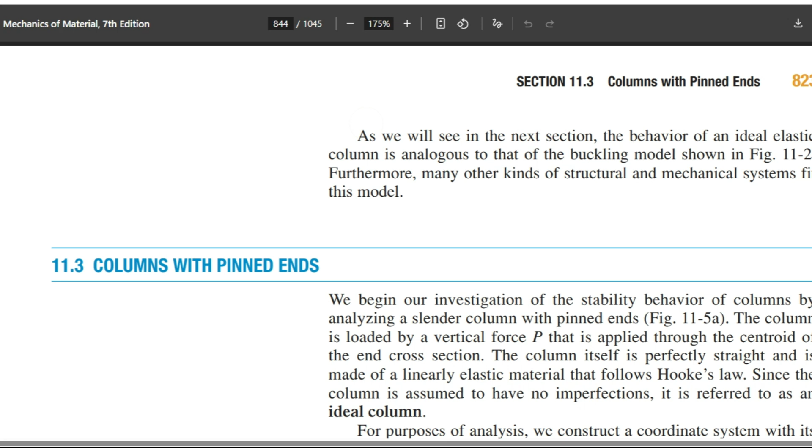But anyway, so we have material mechanics. This is James M. Gere, and we're continuing on column buckling. So let's go to that page. So what we're going to have, we're going to do the derivation. Just so you know, it's going to be like a second order differential equation, and it's going to involve sines and cosines. We're going to try to explain why that happens.

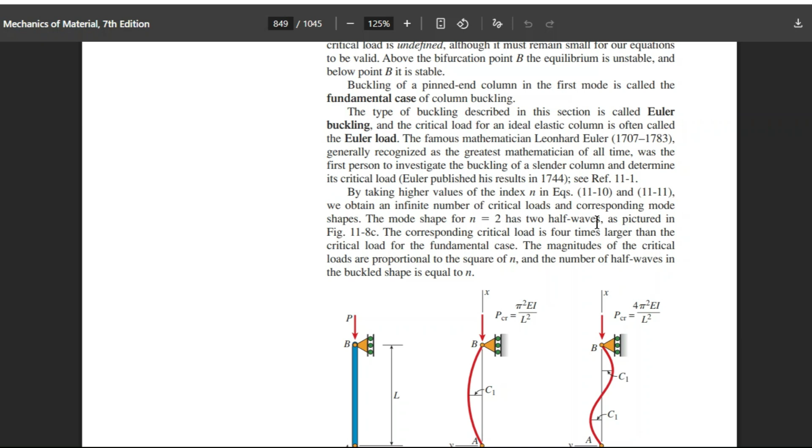So let's see where we want to start, because we do want to get somewhere decent, because here is the differential equation. Let's see if we can do this. Let's just read through the pages. I'm so bad at this, but we're just going to do that because you don't want to read it yourself. So might as well I read it and see if we can not take too many tangents.

So we begin our investigation of the stability behavior of columns by analyzing a really thin or slender column. And we're going to have pinned ends. That's going to be the first configuration. And why we're going to do that is because it's easy to check out the equations anyway.

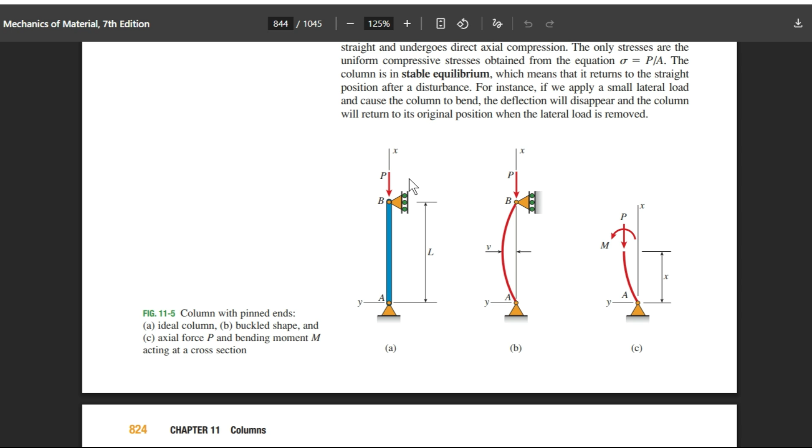So hell yeah, the statics equations. The column is loaded by a vertical force P that is applied through the centroid of the cross section. Anytime you see a figure, go to it and study it. So we got figure 11.5a. Pin, roller, P is going straight through, let's just do one at a time. So that was A: the column is loaded by a vertical force P applied through the centroid of the end cross section. That's important - in that first figure, there is no deflection, so that force goes right through the center of the cross section. The column itself is perfectly straight.

Oh hell yeah, people are liking my stuff. Alright, the column itself is perfectly straight and is made of a linearly elastic material that follows Hooke's law. And if it's just in compression, it's just going to compress like a spring. So we're going to see how it can get off kilter. For these columns, we've talked about how the reason it gets off kilter is because something pulled it laterally off kilter. Anyway, since the column is assumed to have no imperfections, it is referred to as an ideal column.

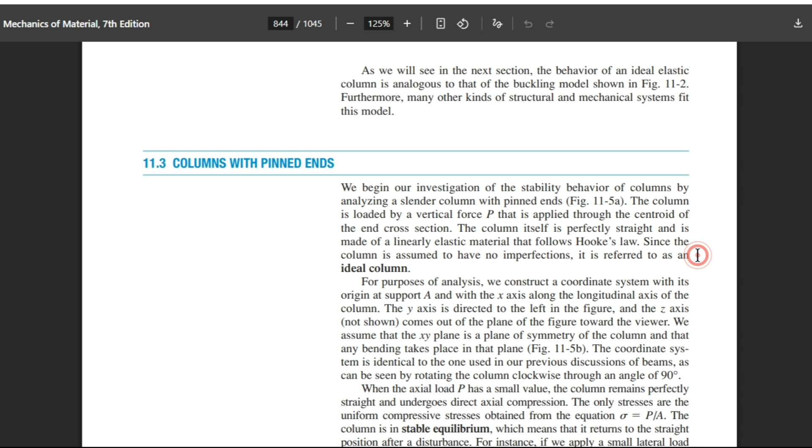And we can even zoom in. So for purposes of analysis, we construct a coordinate system with its origin at support A. So it's probably going to be right there. And then with the x-axis along the longitudinal axis. So that's kind of different. We're going to say, hey, this is the x-axis.

And anytime you throw one axis on, you got to find your other one. So I do the right-hand rule. Do like the karate chop, or do your four fingers in this direction with your palm facing this way. Then you're going to roll your fingers into this direction, and that's going to be x to y. As you roll your fingers, your right hand, your thumb is going to point out of the page. So they're probably going to talk about that.

So the coordinate system - with the x-axis along the longitudinal axis of the column, the y-axis is directed to the left in the figure, and this is where you can use right-hand rule. The z-axis, not shown, comes out of the plane. But I always do that - fingers in the x, roll into the y, and that gives you your z-axis.

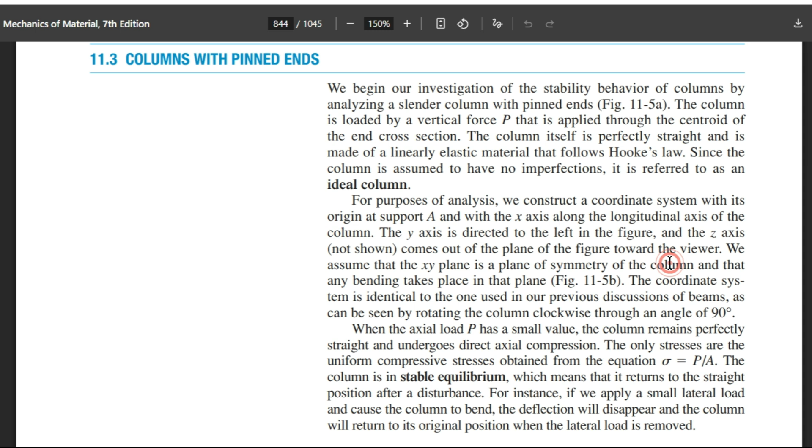Especially if you're going to do any cross products, you have to have your axes correct, else you're just making up an extra negative somewhere in the cross product that you're not going to be able to figure out. Anyway, we assume that the xy plane is the plane of symmetry. So in the page, that's the direction things are going to squish out. That's the plane of symmetry, and that's what we're going to say in the column, and that any bending takes place in that plane.

So now we're going to see figure 11.5b. So when it gets bent, it's going to bend about this - if we're looking at a sheet of paper, just the page, so it's not bending out towards us.

The coordinate system is identical to the one used in our previous discussions of beams, as can be seen by rotating the column clockwise through an angle of 90 degrees. Okay, hell yeah, so that's what we're going to say.

It's like this is just a beam that got bent, but then we just rotated it clockwise. Keep that in mind, because if I have the tradition of just saying this is the x coordinate, positive in that direction, and this is the y coordinate, I would be rotating this thing down that way. And then this is where I kind of got confused.

This is actually bent in a frowny face. That's actually a negative moment, and that's what got me tripped up, because the next thing they're going to show is this moment diagram, and they're always going to put the moment where it makes it positive. So you can see that this frowny face is made by a moment going the other direction, but we always put the positive direction on. And so, that's kind of interesting. But interestingly enough, they don't put the positive direction.

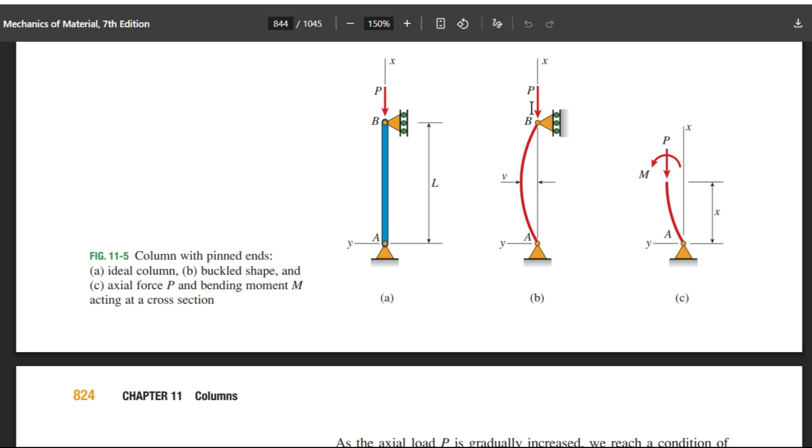Axial tension should be positive, but this is showing axial compression. So, leave it to textbooks to mess with the sign convention. You shouldn't be messing around with that. Every student is just going to get messed up if we don't over-explain the sign convention. Anyway, moving on, that's just the usage of sign convention.

So the coordinate system is identical to a beam, just rotated 90 degrees clockwise. And we can see that ours is a frowny face if we do that. So when the axial load P has a small value, the column remains perfectly straight.

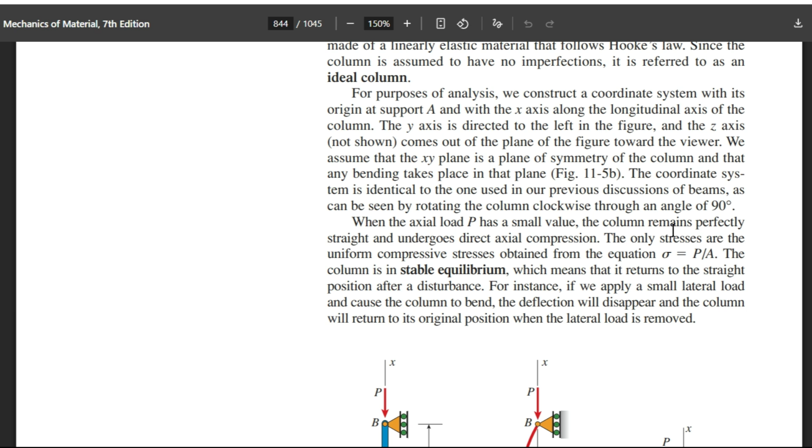This always just remains straight and undergoes direct axial compression, just like a spring being compressed. The only stresses are the uniform compressive stress obtained from the equation, the compressive or normal stress, which has units of force divided by area. It's just the force divided by area, you know what I mean?

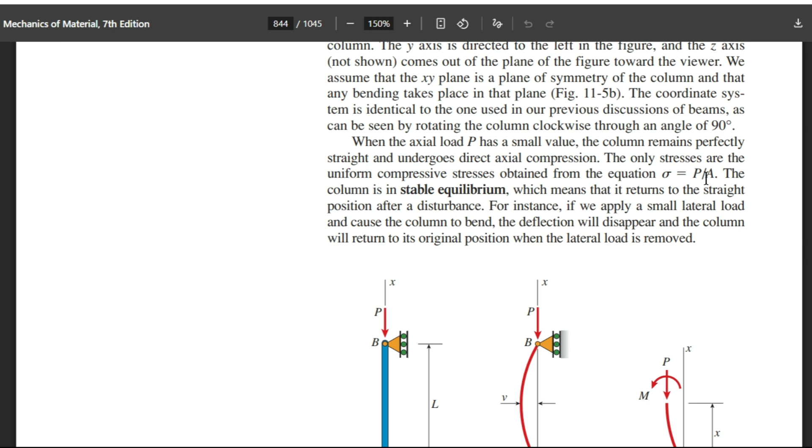The column, in this configuration, is in stable equilibrium. We don't have any bending, bowing, or buckling, which means that it returns. So what they're saying, back up to this sentence, it says when the load is—to actually make these scenarios, previous to this we were setting this up like the 2 bars with a really stiff rotational spring.

So when you apply some sort of change in angle to this spring, hell yeah, it wants to spring back. One way to look at this is this spring is just hella stiff. And it's not that this force P is pushing on the spring—hell no. It's that you're applying a load, hanging some sort of weight, and you are actually pulling this. So for this diagram, you are the external force pulling this column, like the act of God that happens in a building that says, hey, I'm going to shift this column this way.

But that's going to require a hell of a lot of force if this spring is hella stiff. This load then is in kind of a place to actually drive it farther, but you provided that heavy load to pull it outward, and so that load is wanting to spring back. So when you do let go of the load, this force does nothing, and it just returns to a straight position. But then you get into a critical place where maybe you design this column where you didn't get the stiffest spring.

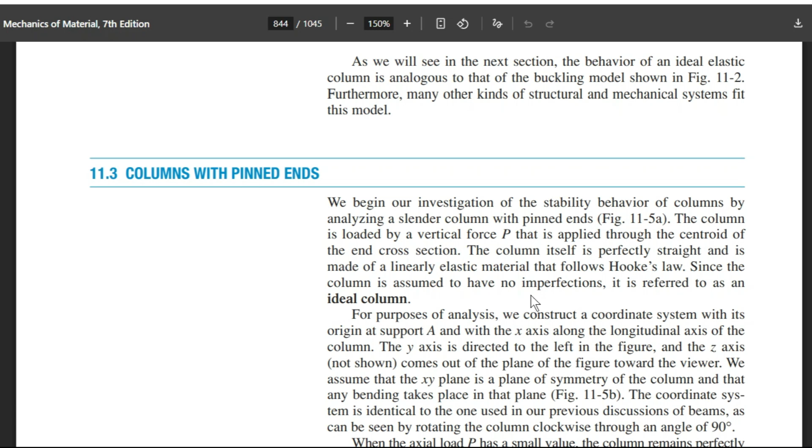So that is critical to the assessment of beams, because that's what we're doing. It's saying, hey, when we apply some sort of little force—this is the act of God, something actually pulled sideways on it—we get this bend to happen, and then we let go, they call that the disturbance in the force. And then it just returns, because this beam is just a hella stiff spring.

You can imagine this beam is just like one of the stiffest bow and arrows. This is the bow, and it's a beam. So if you use a beam as a bow and arrow, hell yeah, you'd be pulling—it's a hella stiff spring. It's going to spring back. So that's what we have going on. Hell yeah, so that's pretty good.

Now we can kind of move on. So this says when that axial load is small, the column is in stable equilibrium, which means that it returns to the straight position after disturbance. I wish they said that sentence in reverse, like, hey, when you disturb the column. I guess they've been talking about what the disturbance is, but I think they could do a better job of dialing that in, because that wasn't too clear for me the first go around.

Okay, so for instance, if we apply a small lateral load and cause the column to bend—see, they talk about that more—the deflection, after the disturbance is removed, will disappear and the column will return to its original position when the lateral load is removed.

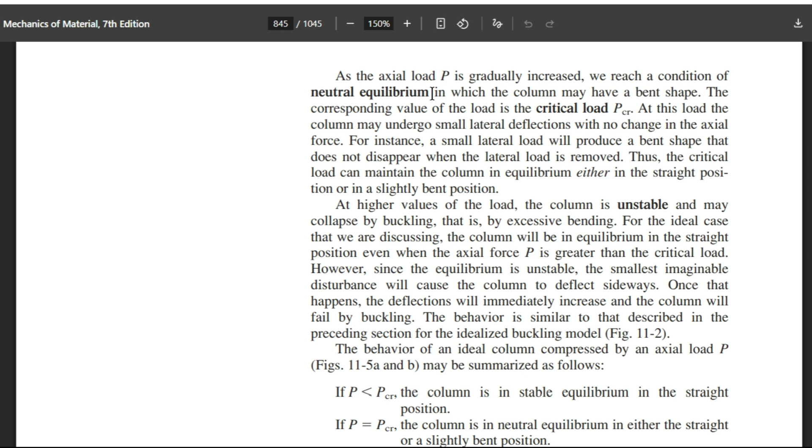So we can come back up here, this is the better one to look at. What we have is, hey, if this part of the beam rotates this direction and rotates flat, we have a collapsed beam. So this spring wants to rotate it back to vertical. We talked about in the other video that if you apply a moment, it doesn't matter where you apply it on a rigid body, it's going to rotate.

Well, I don't want to get into that. But anyway, this moment's going to try to rotate this thing back vertical, and then this load separated by this distance is going to try to make it collapse the other way. So what is this load making collapse? It's because it's providing a torque, which is a couple—two forces separated by this distance. This distance is going to be a function of half the length times sine of this angle.

Because the angles are really small in these, what caused it doesn't take too much of an angle, but we're going to say that sine theta is equal to theta. So this length is just, instead of half the length sine theta, it's just half the length theta. And that's going to be this distance. The force is P, so the actual torque is just one of these forces times that distance. So we have P times half the length times theta. So that torque is a function of theta.

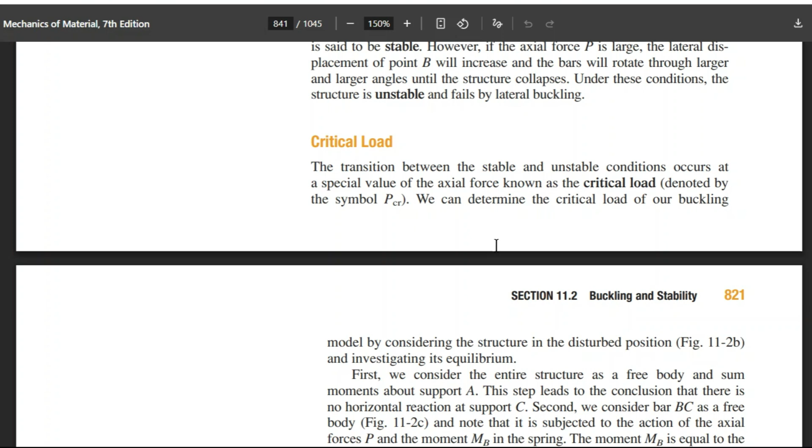And so that's kind of weird and creepy, because people are going to die anyway, since it's not going to take too much more load to just kill everyone. All right, hell yeah. So here's the equation for that. You use this, do a free body diagram, and sum the moments about B.

It's going to be the moment at B, which is the spring stiffness times the angle. The angle that forms, this used to be 180, and now it's this crunched-in angle. If you consider this whole triangle, it has 180 degrees, and then it got reduced by 2 theta. See how all the angles in this triangle had to be 180 minus this theta minus that theta. So this change in angle from there compared to here is 2 theta.

And a positive rotation due to the spring is going to be counterclockwise, so right hand rule, thumb out of the page. And so we come down to here, our moment equation. We're going to sum the moments at B.

We have moment at B positive minus that couple, which is the load, times half the length times the angle. But we can see that this is going to be the spring stiffness times its angle, but this angle formed was 2 times the angle. So we have 2 times the spring stiffness theta minus this load times half the length theta.

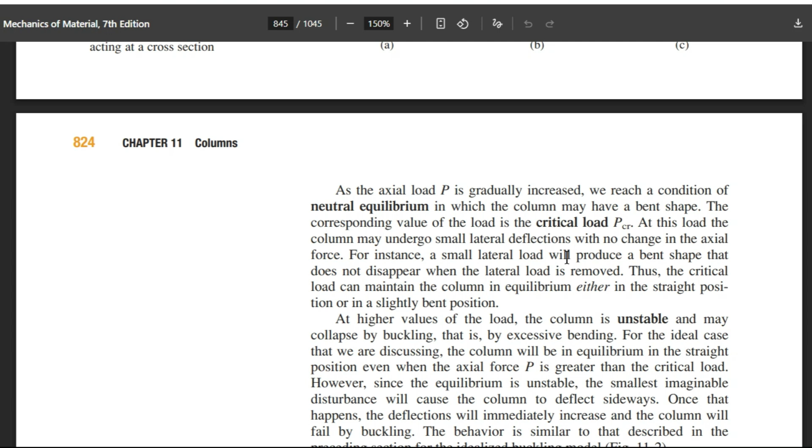So it doesn't matter if I double theta. If both of these terms are equally balanced, then we have no net torque. And so when we do disturb it, so there you go. That took forever, that was pretty decent, getting better at kind of explaining that.

And so when we do have this act of God pulling out, cool. The restoring moment of the bow, we talked about bow and arrow, of this beam is going to want to restore it. But this load is now having a force that, so if we take the moments about A, we're going to see that we have P times this distance.

And that's going to be a moment that causes it to rotate more this way. So if I take just this kind of ideal chunk of beam, if it rotates that way, it's going to flatten and pancake and buckle. If it rotates back vertical, hell yeah, that's kind of what we want. And so what's creating it to rotate back vertical is this moment. But that's where they have just the positive moment on here.

But we know that the moment generated by bending a beam this way is the opposite. Because to bend a beam this way, again putting this x-axis down, if I had my y-axis and x-axis, this beam would be bowed upward, which is a frowny face, which means that on both sides of it, we had to apply a moment this way and this way. So if this is a little chunk of that frowny face, to get this frowny face, I need to take that moment and apply it that way, so the arrow is going tail to tip. But in this diagram, they're just showing the positive moment.

This is kind of messed up because they're not showing positive axial tension. I was thinking if they're showing shear, but no, this is axial tension—this has nothing to do with shear. There is no shear forces on something in pure bending. I think that's a faux pas. They could have shown this in axial tension, knowing that's going to be negative. Why put this in compression, show it's positive, then have this moment, and just throw in the moment like, oh, sign convention says this is the positive moment. Just draw your sign convention so it's always positive for both, not mixed.

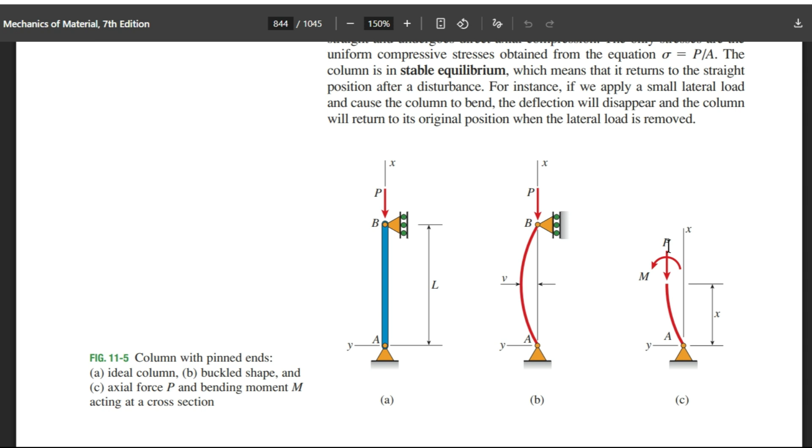That drives me crazy, because no student is going to look at that and know exactly what's happening. So, all right, hell yeah. Cool, so where are we at now?

So now, as the axial load P is gradually increased, we reach neutral equilibrium. We did a pretty good job explaining that, and I think it was important—so the column may have a bent shape. The corresponding value of this load is the critical load P, and the spring force doesn't change in the beam. It's linearly elastic, a function of its material. But this load, you can make this load meet that, so think about it—this load, you're reaching a critical load.

At this load, the column may undergo small lateral deflections with no change in the axial force. And that's the act of God—anytime they're talking about lateral deflections, you are applying an external force to make that happen. It's not the driving force down from the column; from the ideal situation, that column should just be in axial compression. So you are applying that small lateral deflection.

When that happens, we have no buckling and no restoring force. When you think about this small lateral deflection, you have to say you are deflecting it, and it takes a force to do that. You're pulling it because you're moving mass, but then you're holding it in that location, and then letting go, and seeing what happens. In that case, it statically stays there. So a small lateral load will produce a bent shape that does not disappear when the lateral load is removed—that's just another way to say it.

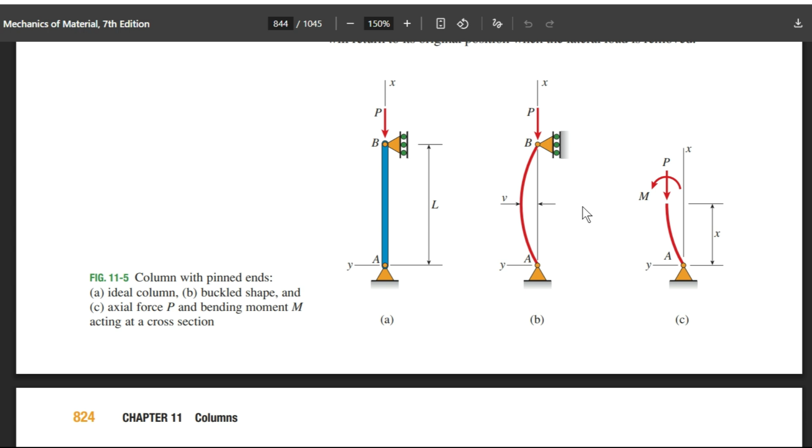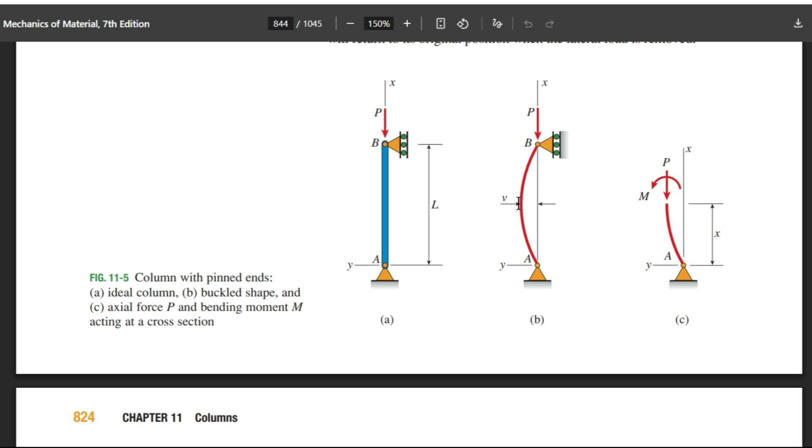So I think that's good to know. It's like we are physically displacing it. Think of a huge giant that can just move it - it doesn't care what it feels like between its fingers. But then once it lets go, oh hell yeah, then you're going to have a collapse.

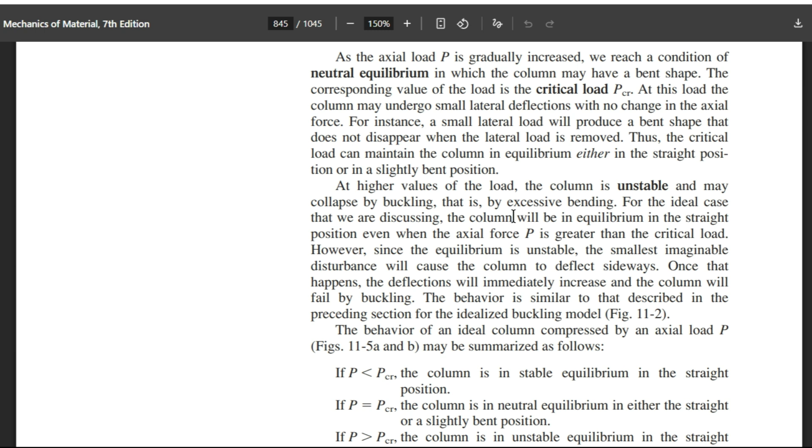Okay, so that's what we're going to talk about - that's the unstable equilibrium. The column was normally just taking a really high load, but it was totally straight. Let's see how they explain it: it may collapse by buckling, that is, by excessive bending.

And they really don't even talk about it - an external disturbance pulls it sideways, and the torque due to the load outdoes the torque due to the bow characteristics, that resisting spring moment of the actual beam.

So for the ideal case we're discussing, the column will be in equilibrium in the straight position, even when the axial force P is greater than the critical load. So this would be kind of cool to set up columns where you get a higher load and then you just push on them and they instantly collapse.

However, since the equilibrium is unstable, the smallest imaginable disturbance will cause the column to deflect sideways. And once it does deflect sideways, then you have a runaway train, because that load based on the angle that gets created causes the moment, and that moment's always going to be bigger than the restorative spring force of the column being bent. So once that happens, the deflections will immediately increase and the column will fail by buckling.

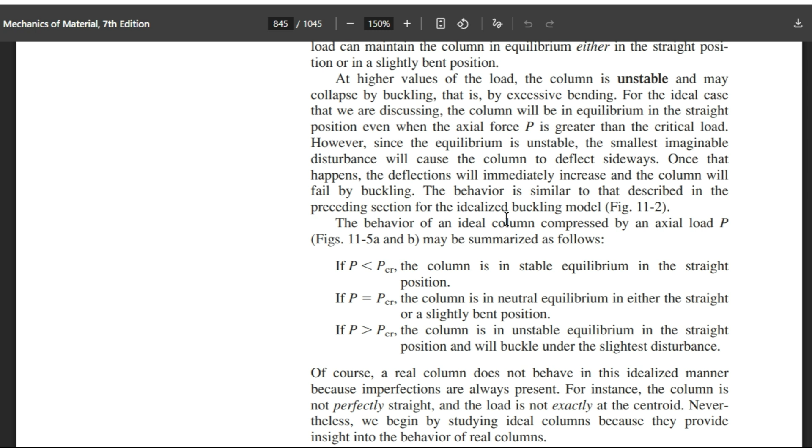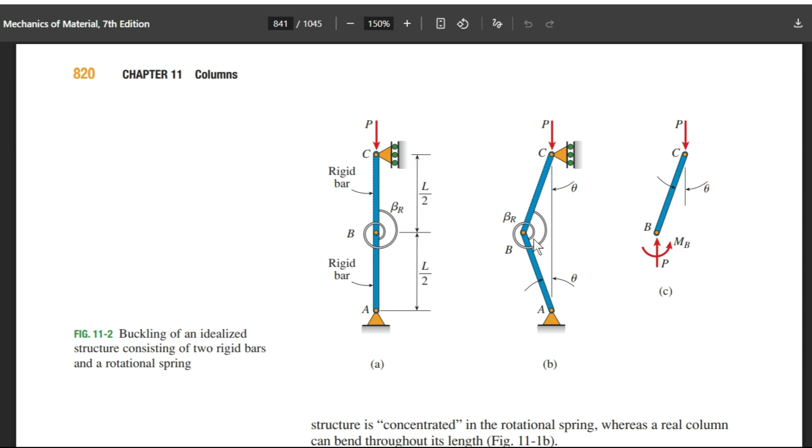The behavior is similar to that described in the preceding section for the ideal buckling model, figure 11.2. I think we talked about that - you provide the act of God and then let go, and this load is creating a torque that's bigger than this weak spring, which is the property of just the characteristics of the beam or the column. So it can't restore and it collapses.

Okay, hell yeah. So where are we at? Yeah, that unstable equilibrium, that was figure 11.2. The behavior of an ideal column compressed by an axial load P may be summarized as follows: that load can be less than the P critical - no one dies, the column is in stable equilibrium. If it gets jarred to the side, it returns to a straight position.

So the column is in stable equilibrium in the straight position, and that's what they're saying - it's in stable equilibrium. That's why you can move it to the side and it still stays stable. It goes back and restores.

If the load is right at that critical point, I mean, you're never going to see that - either people died, or no one's going to be like, oh look at that bridge, it's moving that way, or look at that column, it's bowing that way, hella, and everyone's still on top of it, whatever, and everyone's just happy. Hell no.

But at this P-critical, the column is in neutral equilibrium in either the straight or slightly bent position, and it can move through that bent position. Something like an act of God can move it to a different location and it'll just remain there - it's not wanting to collapse and it's not wanting to restore. And then we have total failure, where the load P is bigger than that P critical - the column is in unstable equilibrium in the straight position and will buckle under the slightest disturbance.

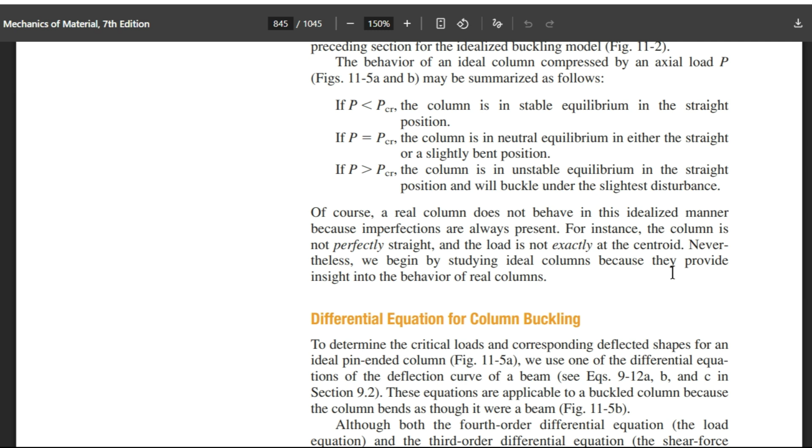Of course, a real column does not behave in this ideal manner because imperfections are always present. For instance, the column is never perfectly straight and the load is not exactly at the centroid. Nevertheless, we begin by studying ideal columns because they provide insight into the behavior of real columns.

And now here's where I'm exhausted - I don't want to do this anymore, and it's just because we're up against differential equations. But I do want to read through this because I think we can. We're just going to go through and solve, and we're going to read - damn it, look at this. We're going to read to at least here, right to where we get to the critical loads.

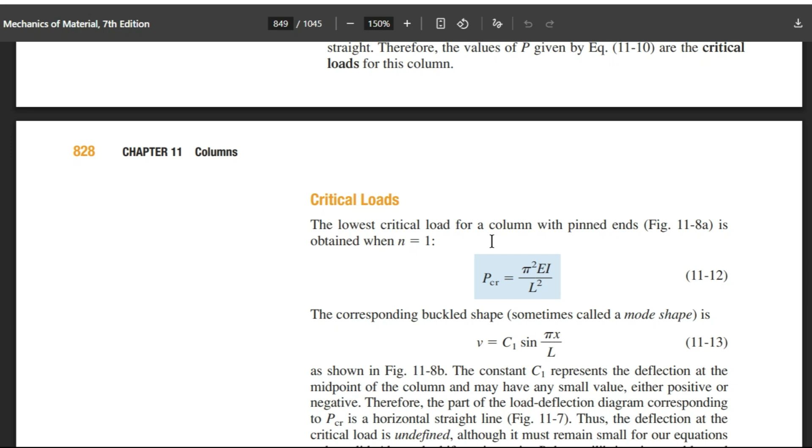I think if we read through to the actual bringing up of the differential equations and solving for the constants, we have to read through the critical loads because we have to solve for C1. Okay, I think we can do it. I don't want to, because it's difficult, but I think we're pretty good on this.

At least for the first go-around. So, differential equations for column buckling: to determine the critical loads and corresponding deflected shapes for an ideal pin-end column, figure 11.5a. So we got to look at these. So there's your figure. The figure is below us.

We use one of the differential equations of the deflection curve of a beam. These equations were in Chapter 9. I'm not going to go thumb back through there, because when I see an equation like this, it's hard to wrap your mind around. But these equations, that's another proof, and if you can go through that proof and see it, good for you, that's amazing. So these equations are applicable to a buckled column because the column bends as though it were a beam. I'm pretty good at beam bending, I kind of understand that.

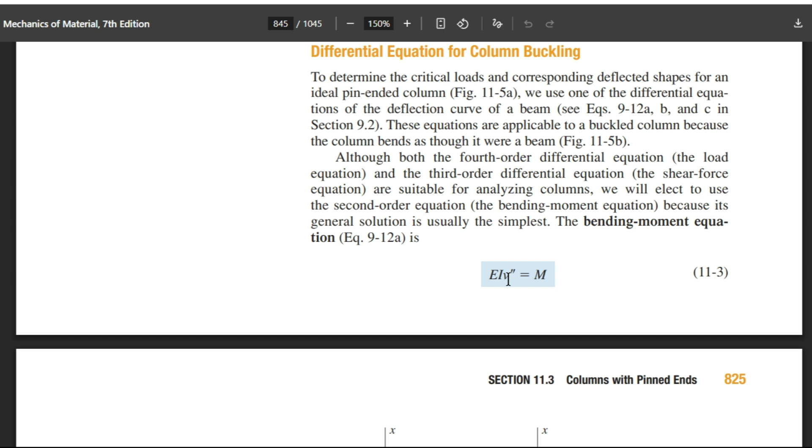Let's read this. Although both the fourth order differential equation - this is a second order differential equation, meaning we have deflection, and deflection with respect to the change in x. Let's talk about that.

Even though we're vertical, if I come out to this distance, let's say x, here's my deflection. If I change x in the positive direction, what happens to my deflection? It goes down - that's the first differential equation. From this point, I'm going to have a negative change in the slope. So if I increase in the x direction by 1 unit, my deflection, v, goes down, but not as much.

That's the first derivative. The second derivative says, okay, from this flat spot to here, it went down, but is it going down a lot? I think it's easier to make bigger slices. From here to there, did it go down very much? No, but it did go down. So from here to here, that first derivative, the change in deflection as I move in x, it went down a little bit negative. And from here to there, over the same distance in x, it went down a lot more.

So if I divide this up into halves: if I change x this amount, this deflection decreased a little bit. If I change x another amount, whoa, this deflection decreased more than half - that was a bigger change in deflection.

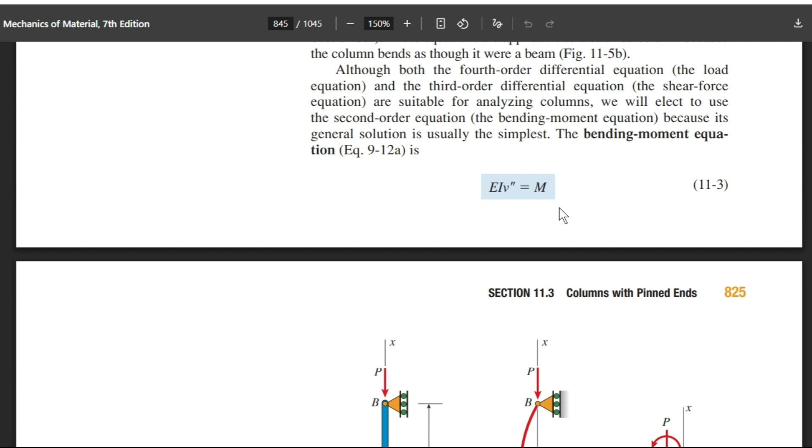So then it says that both the fourth order - was that even for fourth order? No, the first one was deflection, the second one was the rate of deflection - that's the first differential equation. The second differential equation: the first is the slope of this line, the second is the change in slope, and that's what we have. The moment generates a change in angle, a change in slope. But then if you have a change in slope, the third equation is... bummer.

Although both the fourth order differential equation, the load equation, and the third order differential equation, the shear force equation, are suitable for analyzing columns, we will elect to use the second order equation, the bending moment equation, because its general solution is usually the simplest.

And I gotta take a break. Alright, hell yeah, so we got some ice water. We're gonna do round 2. We're gonna pump this out.

So I'd have to go back and be like, what's the fourth order? What's the... you know what I mean? But yeah, because shear, like to actually find the deflection is going to be... like what is that? The deflection, although both the fourth order differential equation, the load equation, so is it saying that this is a fourth order with respect to the load? I think that's kind of what it's implying. Don't quote me on that. But anyway, cool, so I'd have to go back and review that.

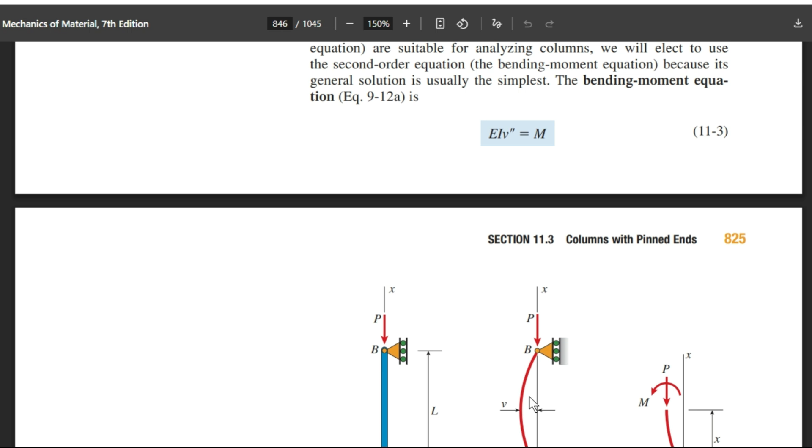So in that equation, M is the bending moment. We have the equation EI times the second derivative, which is the change in the deflection as we change X, and then we have a change in that change. So it's a double derivative, the second derivative of deflection with respect to position along that axis.

I think we did a pretty good job. Anytime you get a differential equation, walk your way through it: pick a value, change your x. What happened? The deflection changed, negative. Now do x again, the deflection changed again, it changed more. So the difference in the change, the second derivative, is a bigger negative number.

So M is the bending moment at any cross-section, and V is the lateral deflection in the y direction. We've already said this is a positive deflection. In the books, when you have the normal sagging smiley face beam, that deflection is always negative. Your beam is smiley facing, your bending moments are positive, but your deflection is downward in the y direction. So this is a negative moment causing this.

The right hand rule—think about this. If I take my right hand and sweep it this way to try to get this, that's not how we determine positive bending. Positive bending is like if I have a section, to actually get it to bend, I have to apply a moment this way, and then a moment this way. Both of those, you can't use your right hand rule because they're different directions. But we're saying that's causing it to smile, and this is a frown, with this as our x-axis and this as our y-axis. Draw this, rotate it 90, and we have a frowning face. The y-axis is up, the x-axis is that way.

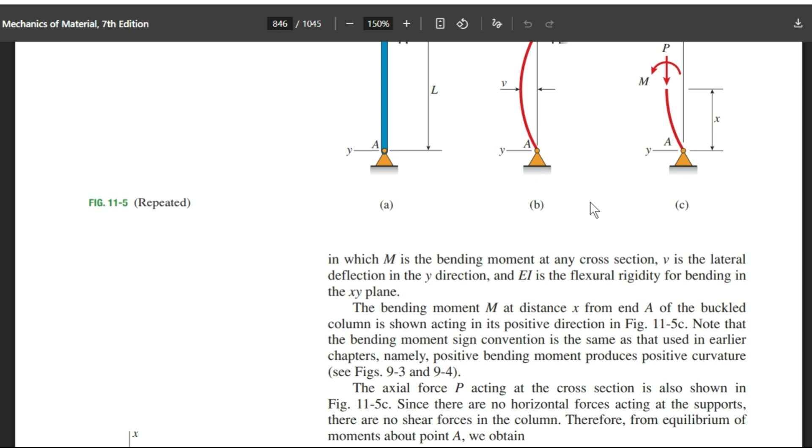Since there are no horizontal forces acting at the supports, there is no shear force in the column. Therefore, from the equilibrium of moments about point A, we obtain this result—so cool, no shear forces. We're just going to sum the moments about point A.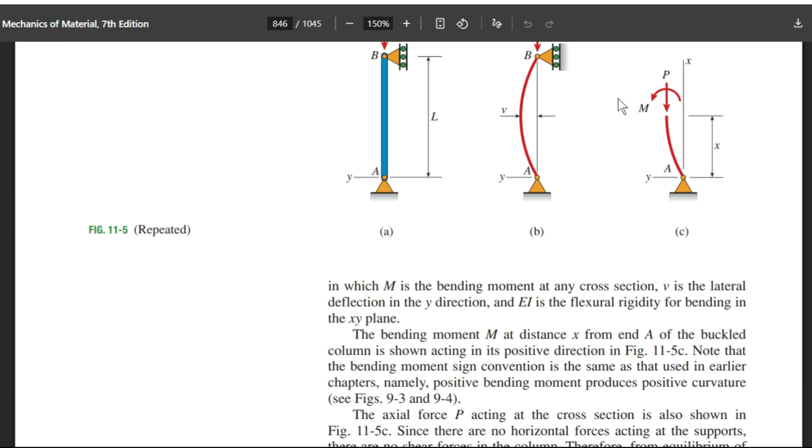This P is offset by some distance, which is going to cause a moment. By the right-hand rule, that's a positive moment. This bending back is going to cause a negative moment. Hopefully that's what we see from this equation. They show the positive moment just being positive, but obviously this is a negative value.

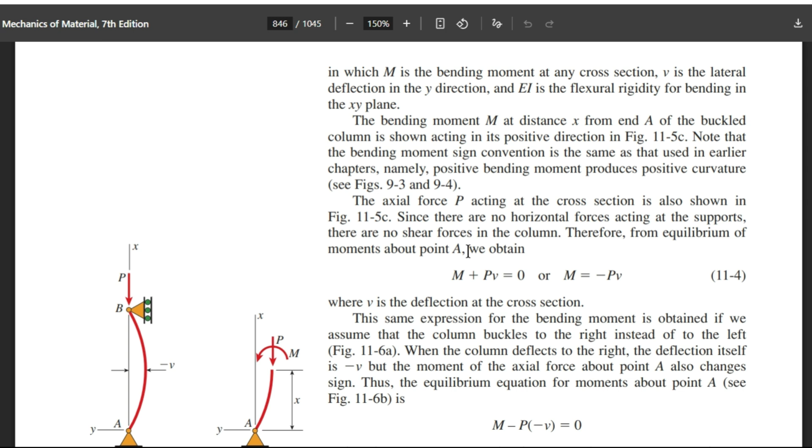And then we have P, PV—the way they have this drawn, P would just be a positive value. So all sorts of things going on here. From the equilibrium of moments about A, we obtain the moment—assuming this is the direction of the moment and this is P, both by the right-hand rule this way.

So I'm going to have M plus PV equal to 0. But if I rearrange and move one to the other side, the moment is actually the opposite of the force and the deflection. So this force with this distance is causing it to rotate that way; the moment has to rotate it the other way for this to maintain equilibrium. That's the equation for equilibrium, where V is the deflection at the cross section.

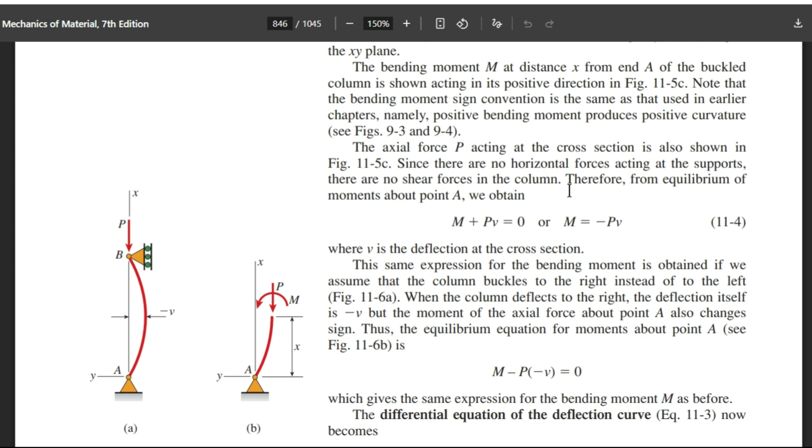This same expression for the bending moment is obtained if we assume the column buckles to the right. So if I move this column buckling to the right, the load P is down, I'm going to have a negative P times that distance, giving a negative PV. But they're going to say that V is also now negative, so I have a negative P and negative V—absolute madness. And then they're still going to say the moment is positive.

So hopefully that's what they do—yes, that's what they do. They say we have a positive moment, but a negative P and a negative V, so we get the same result. But that one is a real humdinger to work through.

This same expression for the bending moment is obtained if we assume that the column buckles to the right. So this is how it's buckling to the right, and the deflection is a negative V—that's what they show here. When the column deflects to the right, the deflection itself is a negative value, but the moment of the axial force about point A also changes sign.

So the moment of this force P also changes, and thus the equilibrium equation for moments about A becomes M minus P times negative V, which is just M plus PV—the same thing, giving the same expression for the bending moment M as before.

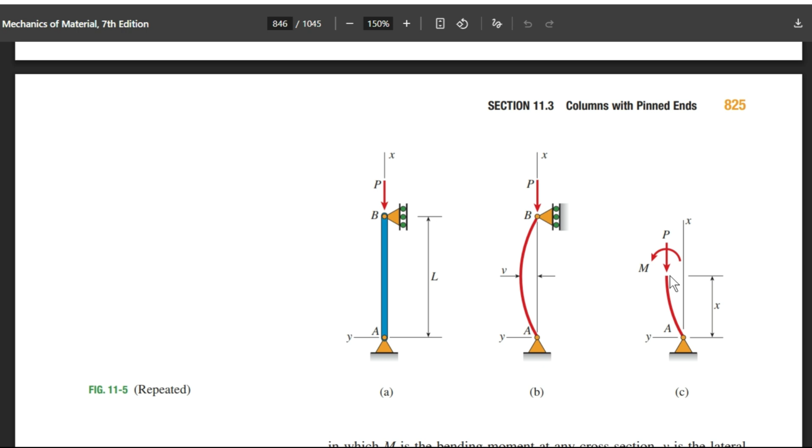The differential equation of the deflection curve now becomes—because we have this moment as a function of x, since we took some random point x and we have a tendency for that portion to, hopefully, remain stable—here's the moment, this is the moment. Let's see if we can actually figure this out. They're going to throw out that equation for the moment.

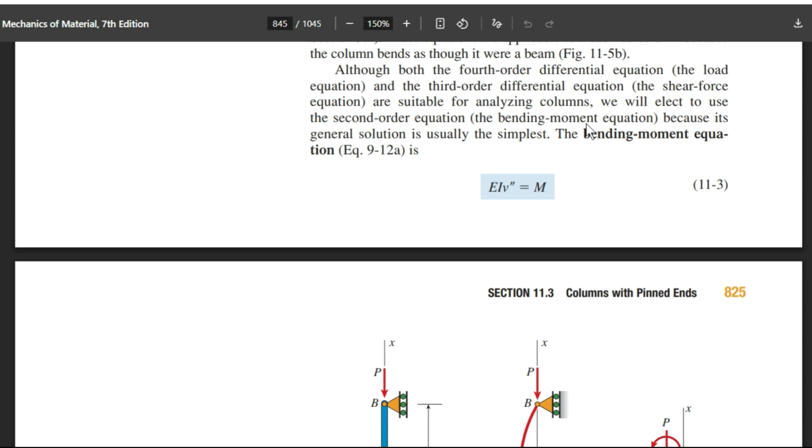So if I look at some deflected shape, the moment generated in that beam is going to be a function. The moment at any location, say this location X—maybe we are at the center, so on either side I don't have any change, that's going to be 0. So I don't have any change in the deflection there.

But if I go this direction, I do have a change—the change in deflection is negative, and if I go a little farther, it's increasing. So at this location, the second derivative is going to be a negative number that's bigger than at other locations—actually it's going to be that value right there, and it gets bigger and bigger as we go this way.

If I started here, I'm increasing—the change in the deflection is positive. But the rate of change is actually getting more positive, then less positive, then less positive again, so that rate of change is actually negative. So that value is going to be negative. I'm not sure if this has to be continuous or not.

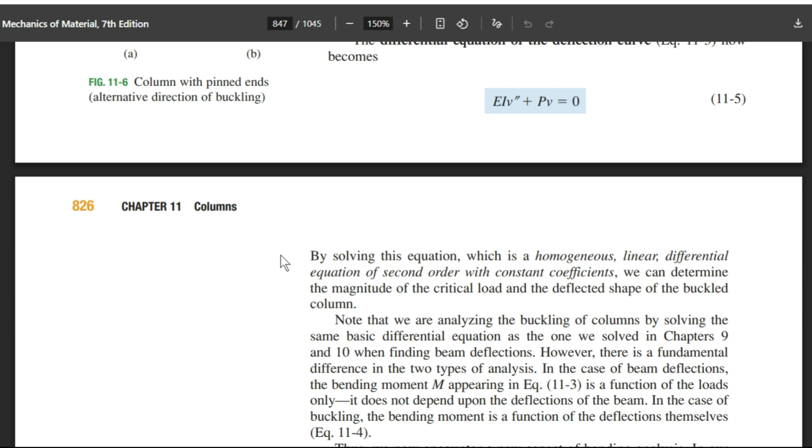Booyah. So this is going to be a second order differential equation. Let's just, this first go around, let me just read the words and then see if we can come up with anything. So by solving this equation, which is a homogeneous, need some water...

Linear differential equation of second order with constant coefficients, we can determine the magnitude of the critical load. See, I'm just spacing out, but we can determine the magnitude of the critical load and the deflected shape of the buckled column. So we're going to solve this, and we're going to get a solution based on the critical load and the deflected shapes of the column. Let's see if we can do that.

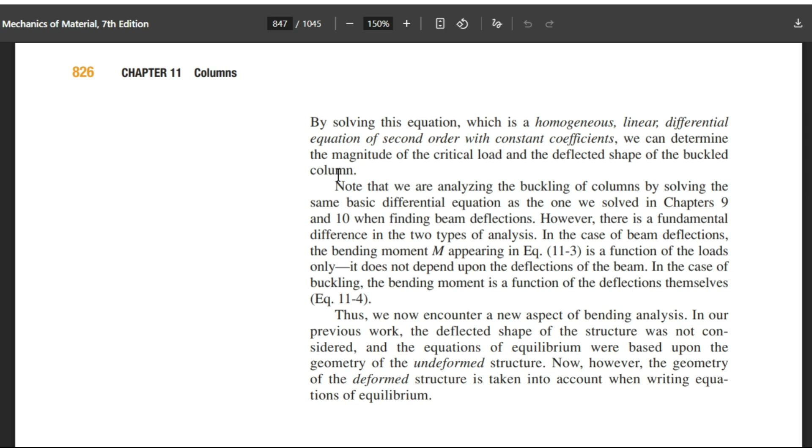Note that we are analyzing the buckling of columns by solving the same basic differential equation as the one we solved in Chapter 9 and Chapter 10 when finding beam deflections. However, there's a fundamental difference in the two types of analysis. In the case of beam deflection, the bending moment M appears in equation 11.3

is a function of the loads only. It does not depend upon the deflections of the beam. So our equation is saying, hey, we are going to deflect the beam out. Is that kind of what we have?

In the case of buckling, the bending moment is a function of the deflections themselves. That's kind of the act of God part. So the only reason this is actually going to fail is that something deflected it. So this part of the equation is probably the difference between the other equations from the other chapters.

So at any value of x, I'm going to throw a value of x in, and I'm going to get a deflection. We can even talk about that because it's good to see, because this is where I'm okay at doing this. If I say, hey, this is my x value, at x equal to 0, there's 0 deflection. So now let's go back to this differential equation.

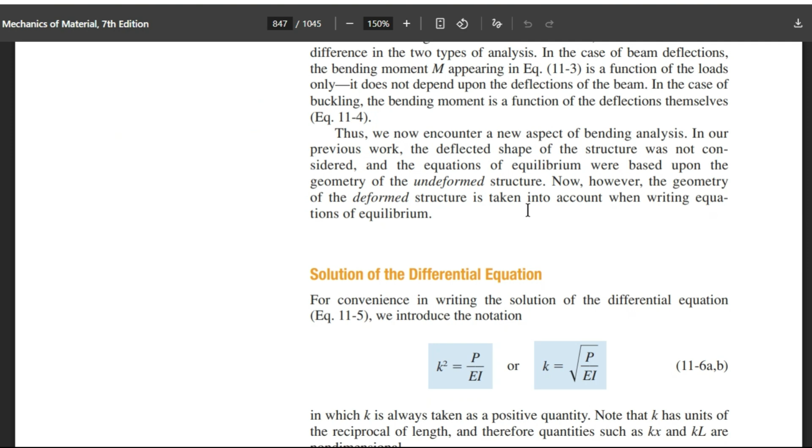And then what are the other locations? The other aspects of sine and cosine is when x is equal to, well, that's where they're going to get into it. This is an angle in radians. And if it's 90 degrees, is that what you say? You know what I mean? If you have sine of 90, this becomes 1, and this becomes 0.

And so if this value right here, kx, becomes like that 90 degrees, which we call pi divided by 2, then this becomes 1, and then the deflection... yeah, but I think we just need to read more about that one. But yeah, we got the first one down. That was pretty solid.

And then we kind of understand from a word-based perspective, this is different because we are actually providing the deflection, and that comes into our equilibrium equation. And our equilibrium equation is a...

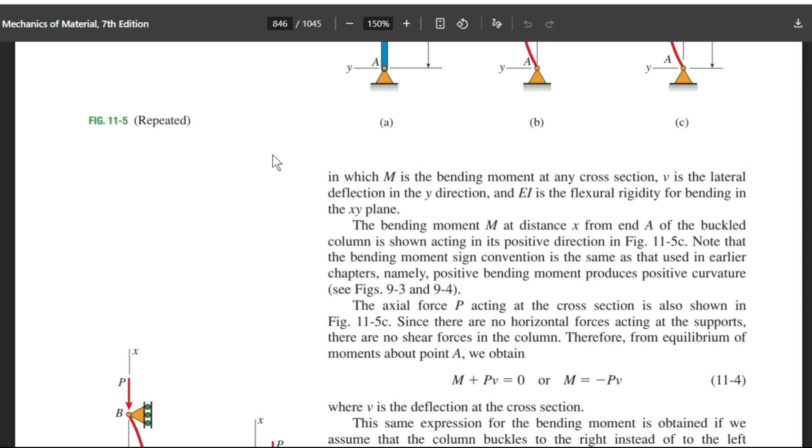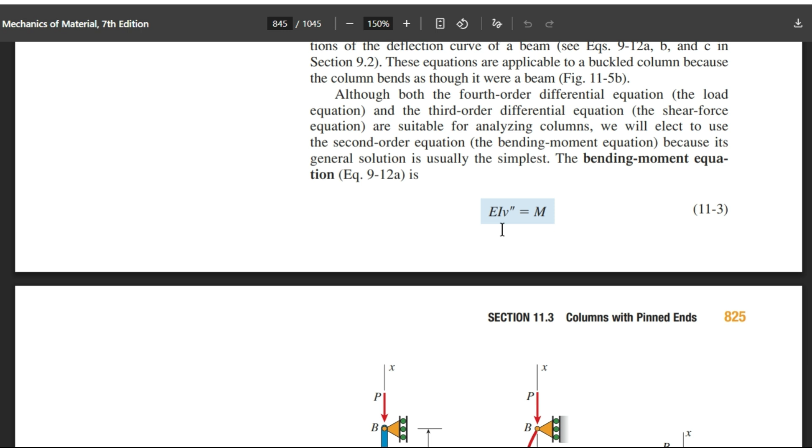Differential equation, because the value for that moment is a function of, let's read this, the material properties and the rate of change. I think I could explain that in the next videos because we have molecules that are getting bent, and the moment is going to be the change in the angle. If I have a continuous arc, like a continuous circle, let's not get into that, I'll lose my mind on the differential, but I do want to get more juiced up on that.

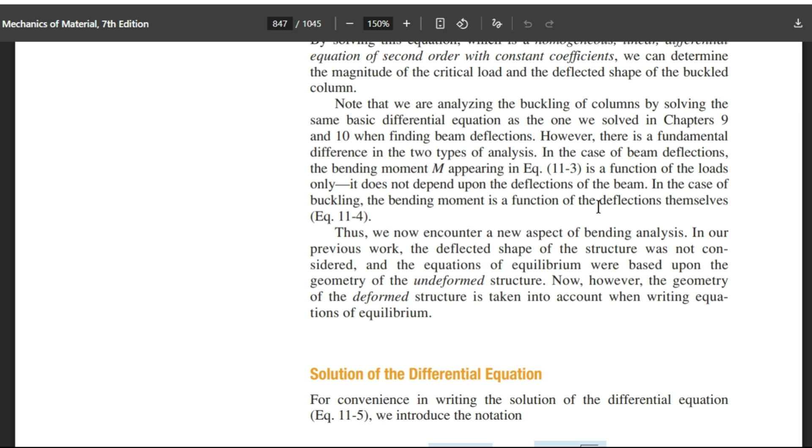So now, note that we are analyzing, where are we at? So we talked about how that is a function of v. In the case of buckling, the bending moment is a function of the deflections themselves. Thus, we now encounter a new aspect of bending analysis.

In our previous work, the deflected shape of the structure was not considered, and the equations of equilibrium were based on the geometry of the undeformed structure. That is kind of cool, because all the stuff we did in statics assumed the structure doesn't deform at all. Once forces are applied and the shape changes, you have to go change the shape and rerun the statics, and you get different numbers, so you have to iterate back and forth to actually find a stability point.

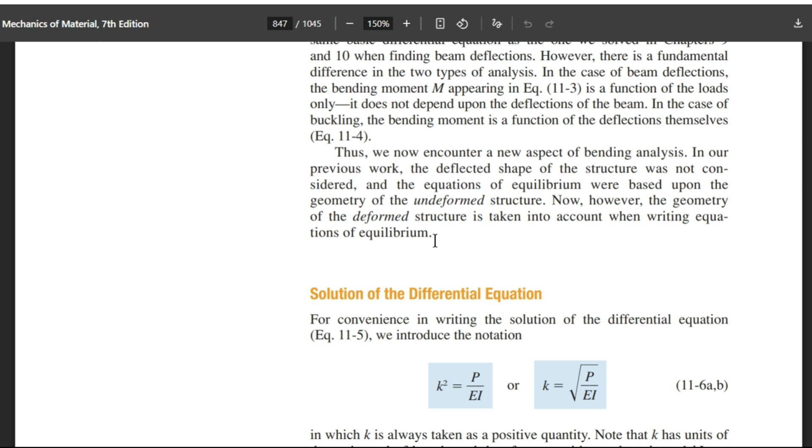And so now, however, the geometry of the deformed structure is taken into account when writing the equations of equilibrium. I do like this one because the whole aspect is having that act of God actually provide that disturbance and that deformed shape, and then having this equilibrium that's either going to fail, restore, or reach a critical value.

And from this proof, the only place where it does reach equilibrium is where it is perfectly at that P is P critical. So throughout, P is going to be P critical, because that's where, if this is the equilibrium equation, this P is P critical. Maybe it's a general P because they haven't put the subscript P critical, so sometimes I get ahead of myself on that.

All right, so here's the solution of the differential equation. For convenience in writing the solution of the differential equation, we introduce the notation. So, where are we at on this?

Because if I have EI, let's say I divided everything by P, I'm going to have EI divided by P. And then this P divided by P, and 0 divided by P. So it's just going to be EI divided by P, times the second derivative of deflection, plus V. So if I divide everything by P, that's what we get. And then they're going to introduce, P divided by EI.

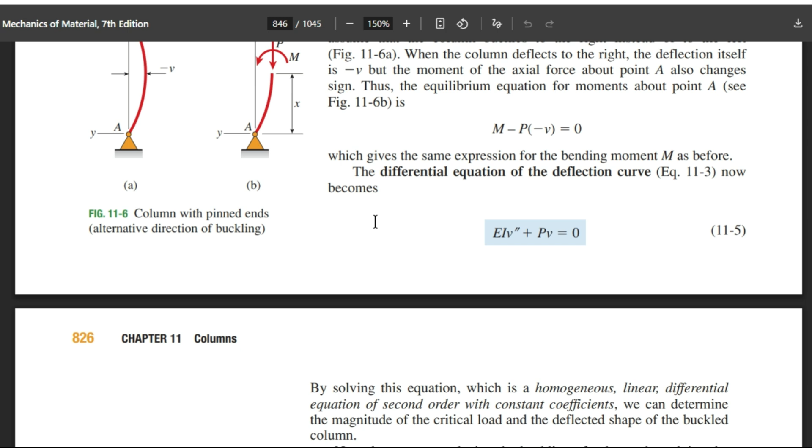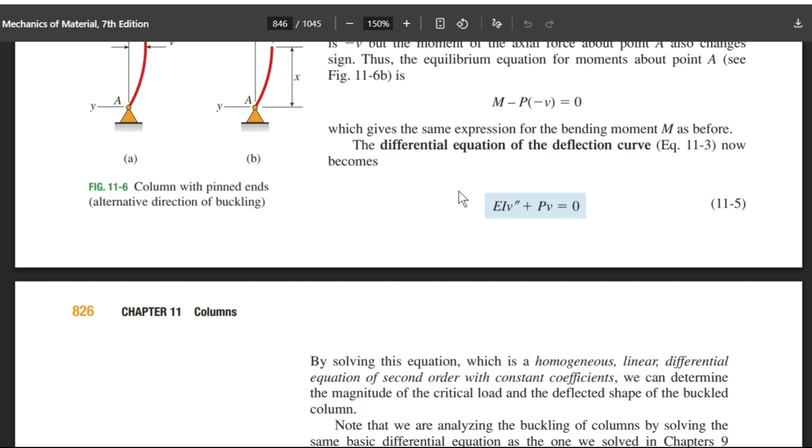But then they're going to say P divided by EI, and the square root of that is K, where K squared is going to be P divided by EI, even though we can see we can divide this by P, but we're going to define this as a parameter. You do that just based on the solution, and it's going to explain it. So K is the square root of P over EI, in which K is always taken as a positive quantity.

Note that K has units of the reciprocal of length, and we can talk about that. This is force, this is force per area, so the area pops upstairs, that's a length squared, and this is length to the fourth. So we're going to have that divided by length to the fourth, and this is going to be divided by length squared. So if K squared is divided by length squared, K is just inverse length, reciprocal of length.

And therefore quantities such as Kx and Kl, which we'll see in our differential equation, like right here, Kx, are dimensionless.

And that's what we need for sine of angles. They're dimensionless, non-dimensional. So using this notation, we can write equation 11.5 in the form of this K squared.

So that's kind of fascinating, so here you go. K squared is P divided by EI. So I need this term right here to be P divided by EI. So my bad, I did it the opposite way. Instead of dividing everything by P, my bad, you divide everything by EI. So this, and that makes sense.

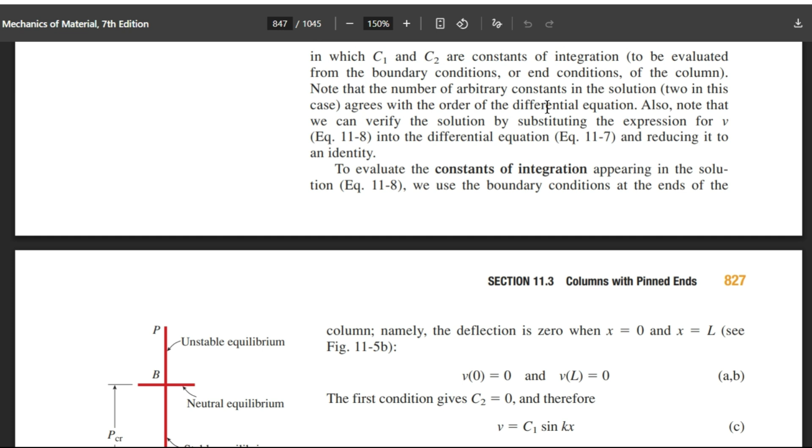That's the bread and butter of this, because that's the second constant. So we have C1 sine kL equal to 0, and from here we have a product of two things equal to 0. So we do have a trivial solution where C1 is 0. From this equation we conclude that either C1 is 0, or this sine kL is 0 - and k is a parameter, a function of material properties and that critical load.

So now we have the juice of this. It's kind of in the form of something repeating, like a circle. But anyway, if this part of the equation is 0, then we also have a solution for equilibrium. So this general solution of deflection holds when this constant C1 - what does it mean? Constant 1 can be anything as long as... but that's another way to get this to be 0.

But then what the hell does that mean, C1 is equal to? From this equation we conclude that C1 is either 0, or C1 could be anything, but then the sine kL has to be 0. We will consider both of these possibilities.

So we have case 1: if the constant C1 equals 0, the deflection is just 0, v is also 0. That's probably the trivial case, and this is where the column remains straight. In addition, we note that C1 equals 0 - because if both are equal to 0, then it doesn't matter where we are along the length, there is no deflection. Think about that.

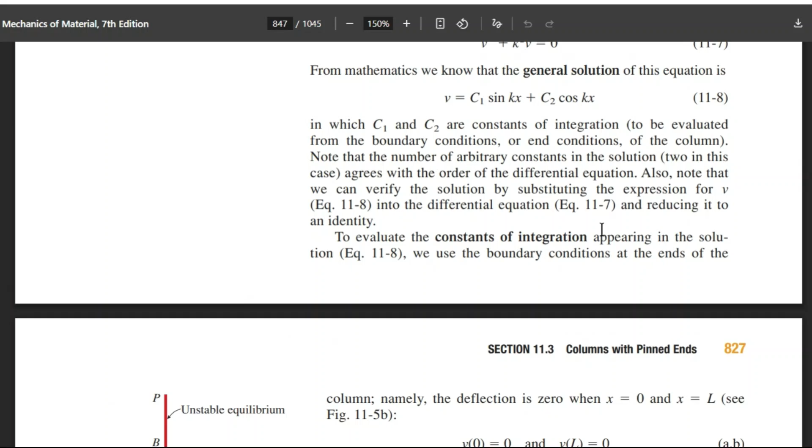I think they should have written this general solution with all the players - where do they actually write it with K? They really don't. That's a bummer. If you threw this in here, it would be kind of cool, because then you could see that if C1 is 0 and C2 is 0, the load can be anything, but that's still satisfying equilibrium. We got this general solution from an equilibrium equation, and the load can be anything because our constants of integration are 0.

So the load being hella huge is going to be that unstable equilibrium. They're saying that mathematically the trivial solution is represented by the vertical axis of the load deflection diagram in 11.7. So this is the diagram of stability points, this is equilibrium. If I have a huge load and the beam is straight, there is no deflection, I can be way heavily up here and we're just in unstable equilibrium.

To read this diagram, I'd say you provide the act of God. If I'm up here and I take the beam and move it sideways at that same load, we're going to have a collapse because that location is outside equilibrium. Anytime you take this at this load level and move outside this line, it's either going to collapse or restore back to 0 deflection.

So if I'm down here, stable equilibrium, the loads are real small, and I have that act of God moving the whole column sideways, this is going to restore back to there. And that's where we get this line.

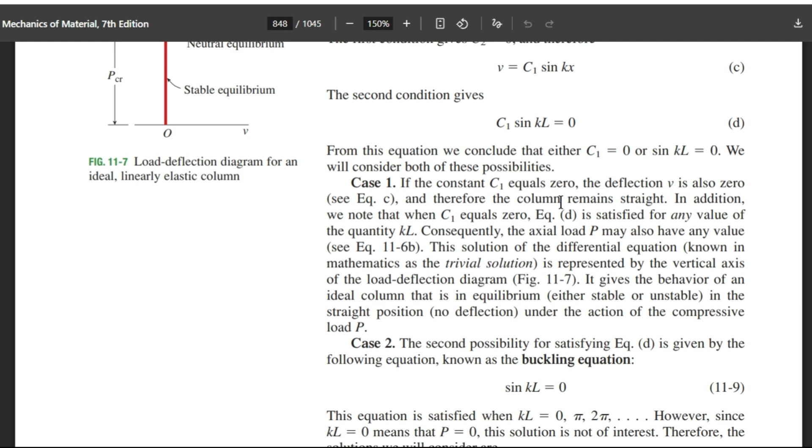We just said that if C1 and C2 are 0, P could be anything, and it's still going to have 0 deflection, but it's going to be represented by an unstable piece of equilibrium. So that's figure 11.7. It gives the behavior of an ideal column that is in equilibrium, either stable or unstable, in the straight position, no deflection, under the action of compressive load P.

Case 2, the second possibility for satisfying that equation is equation D. So we can come back up here. This is equation D, where this is 0. We need to figure out our constant of integration, but this part, the constant of integration could be anything, and sine could be anything.

Maybe let's talk about that, because if this value is 0, then this term goes to 0. Yeah, that's still... and our constant of integration over here is 0. So we're still in equilibrium. That's kind of confusing me, but hell yeah.

So let's just read on and see if we can crack this. So case 2 is where this is equal to 0. The second possibility for satisfying equation D is given by the following equation, known as the buckling equation. Oh yeah, and I kind of remember, that's cool.

I think they really need to write this equation with these values in here, with this k being right there. Because if I am saying that this side of the equation is 0, well the only way this side of the equation is 0 is if the thing in here equals 0, but it can't equal 0. Well, the load could be 0. Then it's 0, but that's a nonsense value.

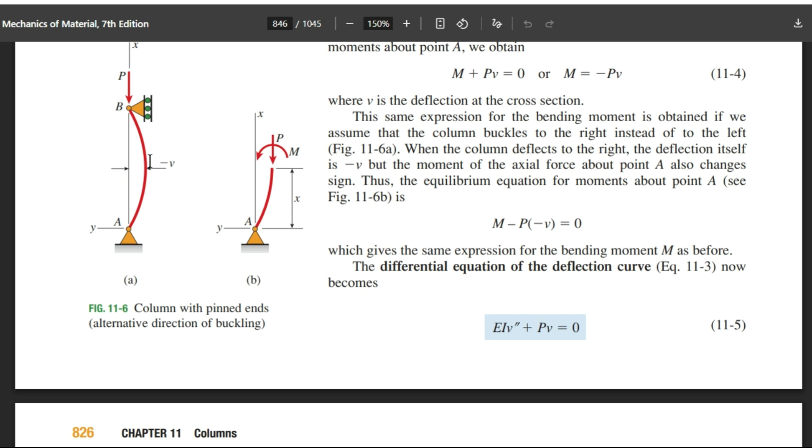So yeah, I am going to throw in L here as the length. So that is fascinating—we're still saying that across the entire length, x can be equal to 0 or x is equal to there. And this is the structure we're showing, which is represented by this solution.

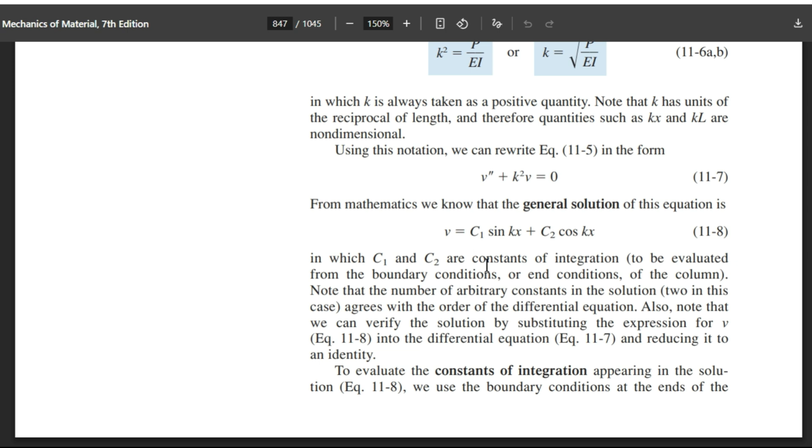I get that it's sines and cosines, and you kind of have those shapes. That's all, that's kind of where I'm at on that. So yes, this value is going to...

So if x is L, that part of the equation is going to be the bigger part. And then k is going to be this part of the equation. And let's just get rid of the square root and pretend it's kind of linear.

So I'm going to have a value for x and then a value for p. And if my value for x is L, the largest it can be, then the value for p is going to be the smallest to get this to be pi divided by 2. Once this is pi divided by 2 at distance L, that's where this is going to be P critical.

And because this is the equation for the beam from any location of x, that's going to be the most critical value. So from their derivation, P critical is where x is L, and this part of the equation, the square root of P divided by EI times L, is going to equal pi divided by 2. So let's see if that's the case.

So we have sine KL. Oh, and then why are they saying it's just pi? Did I get that wrong? Sine of 90, is that pi? No, that makes no sense. Oh no, sine of 90 is 1.

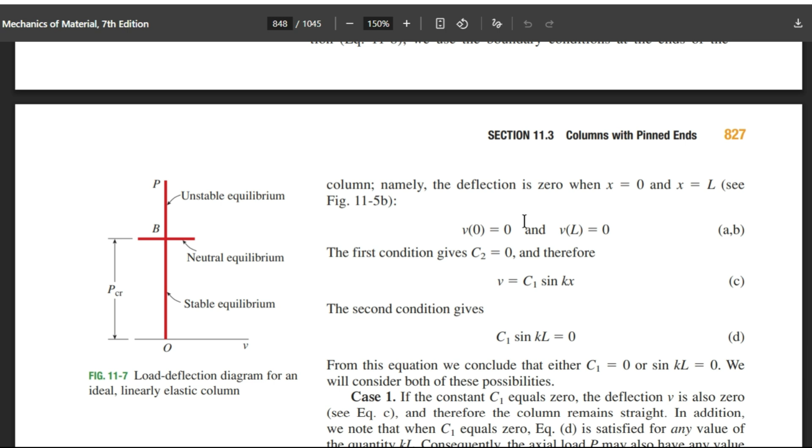So my bad, yeah, that's just a huge... sorry, I've been going through this and just realizing that no, sine of 90 is 1, sine of 180 is 0. So that's a simple mistake, but I hate mistakes like those because it seems fundamental—that obviously is going to give you a trash answer, and it's just real easy to make.

To be like, no, this is going to be 0 at angle 0. At 90, it's going to be 1. And then at 180, it's also going to be 0. So when I throw an L in here, and this is square root P over EI, it's when this equals pi—not pi divided by 2, but pi radians—that is going to be where this is P critical.

Cool, and then they're going to go into the other ones where, well, what if this value is equal to 2 pi? If I have length here, and this is the square root, forget the square root—if I have length and p is equal to a number like 3, cool.

Length doesn't change, and the number 3 doesn't change, so p is that P critical. But now let's say I increase this 3 to 6. Now I have PL equal to 6. Now my P critical can double. See, that's where... so if I have PL equal to 3, that's this whole idea.

PL is equal to pi, and I'm really simplifying this—let's just say this is P, and x is L, the biggest value of x you can have in the column. So I have PL equal to 3, and pi is 3. And then I can double pi to 2 pi, and then I have PL equal to 6. So the P critical can double.

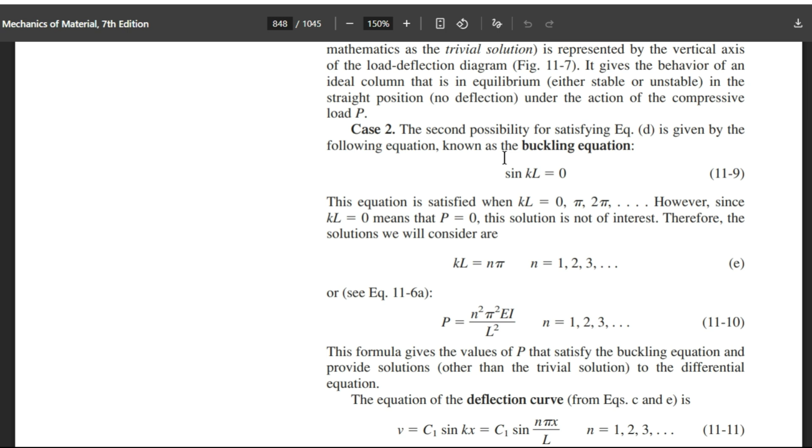Instead of just KL is equal to pi, they're going to say KL is n pi. So there you go, that solves that aspect. And yeah, where did they go? See equation 11.6a.

All right, so 11.6a. And where are we going to apply that? I don't get how they just jump to—so we have P is equal to this. Therefore, the solutions, I guess we have, what, 2 solutions? Oh man, do I have to pause this? I sometimes have a hard time being like, what are we even talking about now?

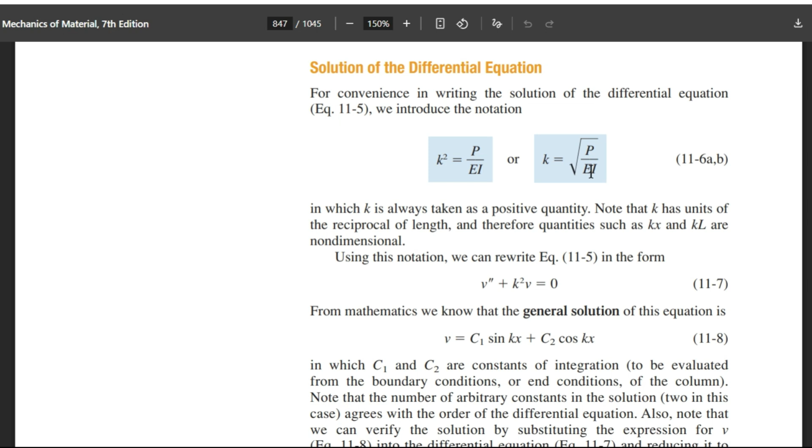But this was a function. We said sine KL is equal to 0. So right here we have KL is equal to N pi. And that's why they need to do 2 more steps in this book. I mean, we just talked about what the hell K was—it's the square root of P divided by EI, that critical load divided by just the construction of the beam itself and the material it's made out of.

So let's see if we can intuit this. The square root of P divided by EI is equal to N pi. So what they're trying to do here is get P by itself. Again, K is the square root of P divided by EI, so I'm going to take L to the other side, and then I'll have N pi divided by L on the other side. I'm going to square both sides.

So then I'm going to have N squared, pi squared, L squared—that's where those terms come from. And then I still have P divided by EI over here, and I'm going to have to multiply EI up there. But that's crazy, they don't even show you what K was within this. I guess you could just see it—it's on the other page. So that's horrible.

No, I mean, I can't say stuff like that because I really enjoy this textbook. It's just really good. But I love when I can see stuff that... obviously textbooks are difficult to read because you're just like, whoa, they went from here to here and I almost lost my mind. I was like, I don't even see that. But now we have this P critical.

And again, we don't have to use n is equal to anything, we can just use n is equal to 1. So remember that? n is just 1, pi. So I can say that P critical is just pi squared EI divided by L squared.

Let's see what they do with this. This formula gives the value of P that satisfies the buckling equation and provides solutions other than the trivial solution to the differential equation. The equation of the deflection curve from equation C and then E is, now we have V is equal to C1 sine kx, because C2 is 0. But now I have C1 can be any value and then sine of...

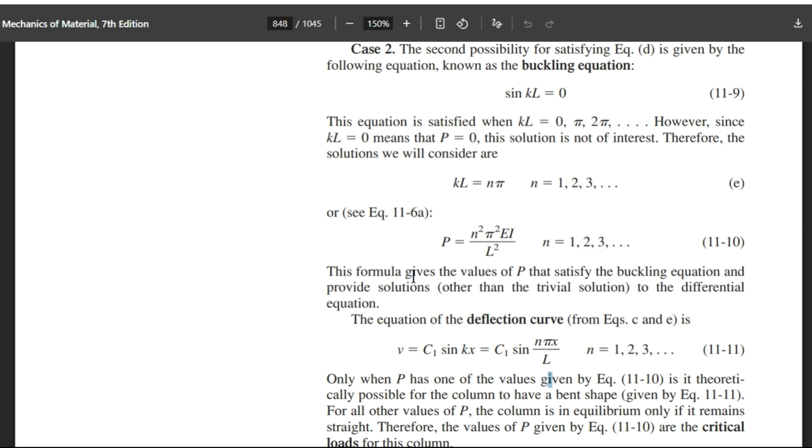So they say the lowest critical load for a column, and why do they call this the lowest critical load? Oh yeah, it's the lowest, it's the least amount of weight before this thing's going to buckle. So yeah, and we talked about that. The lowest critical load for this column with pinned ends is going to be attained when n is equal to 1. So we're going to go back up to this equation. When we throw n is equal to 1, that's going to give us our value for P. And so now P critical is pi squared EI divided by L squared.

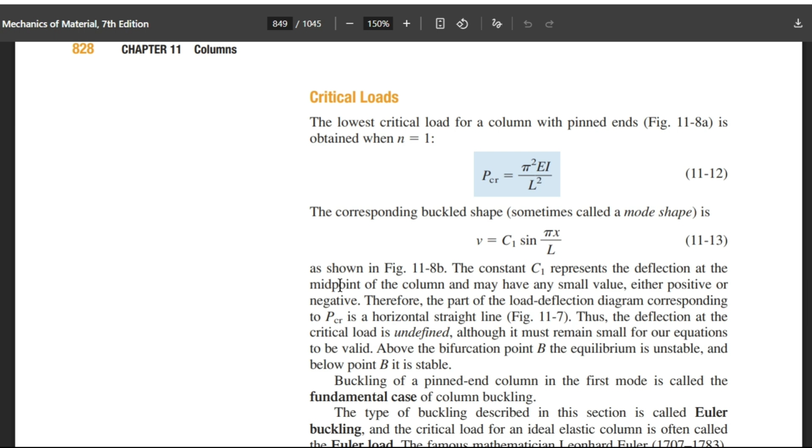And the corresponding buckled shape, sometimes called a mode shape, is going to be the deflection, C1 sine of pi x over L, as shown in figure 11.8b, so we should probably go to these figures.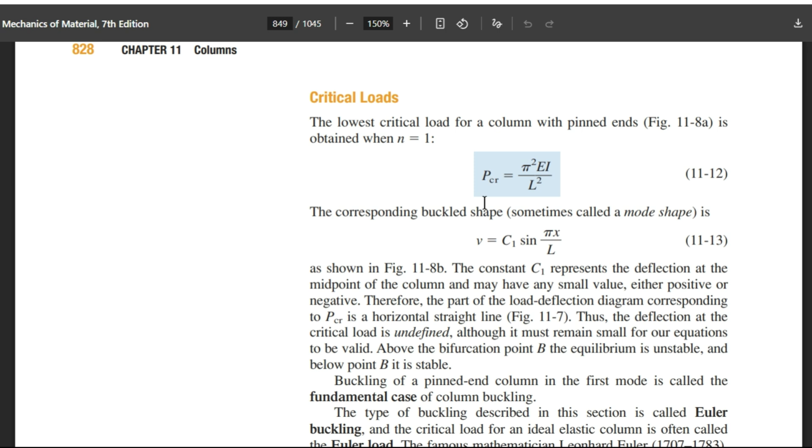All right. So that's going to be the lowest, and we have P critical, and the corresponding buckling shape is going to be this. So if I throw L in, I'm going to get sine of pi. It's not 2 pi, so this is the first, the corresponding buckling shape. This is the mode shape, and that's going to be that first figure.

The constant C represents the deflection at the midpoint of the column and may have any small value, either positive or negative. That's fascinating. So if I throw in L divided by 2, then I do have 1 here. Okay, yeah, so there you go.

So we were doing the boundary conditions when x was L, we have sine of pi, that's going to be 0, making your deflection 0. But as we travel halfway, we have L divided by 2. So L divided by 2 divided by L, that's pi divided by 2, that's 90, that's sine of 90. So that's where we're going to see the most deflection.

And that deflection is this value C1. So the constant C1 represents the deflection right there, so that's what they have, C1. When you have more nodes and it's supported, that's going to be your value for C1. Cool.

Therefore, the part of the load deflection diagram corresponding to P critical is a horizontal straight line figure 11.7. Thus, the deflection at the critical load is undefined. Or what are we talking about? Didn't we just talk about that?

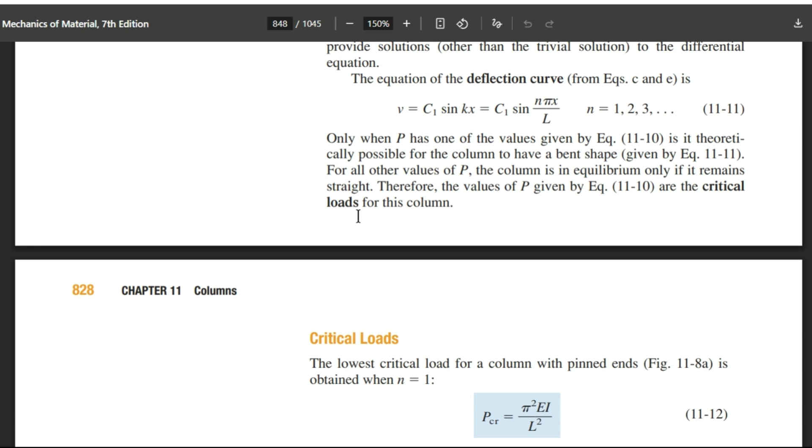Okay, so let's read this. The constant C1 represents the deflection at the midpoint, because we talked about that, of the column, and may have any small value, either positive or negative. Therefore, the part of the load deflection diagram corresponding with P critical, yeah, so there you go. So that can have any small value, actually.

So that is this location. That is in neutral equilibrium, because our equation, we took our equation from equilibrium based upon this idea that P critical makes the moments balanced. And we had a differential equation we were trying to solve for. So that P critical is where C1 can represent any value or any movement of C1.

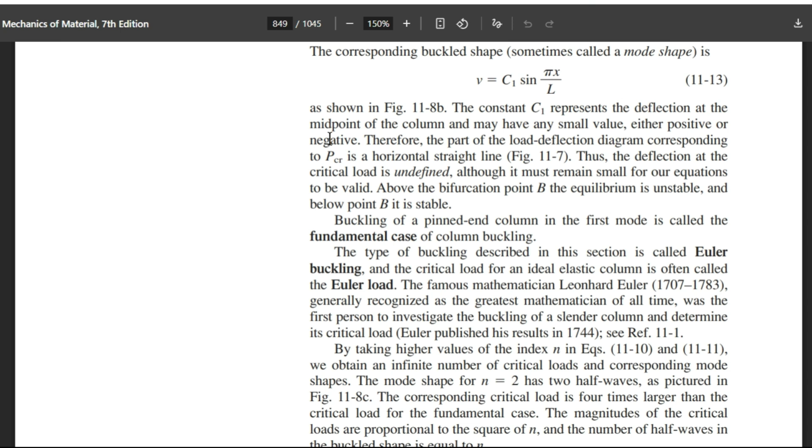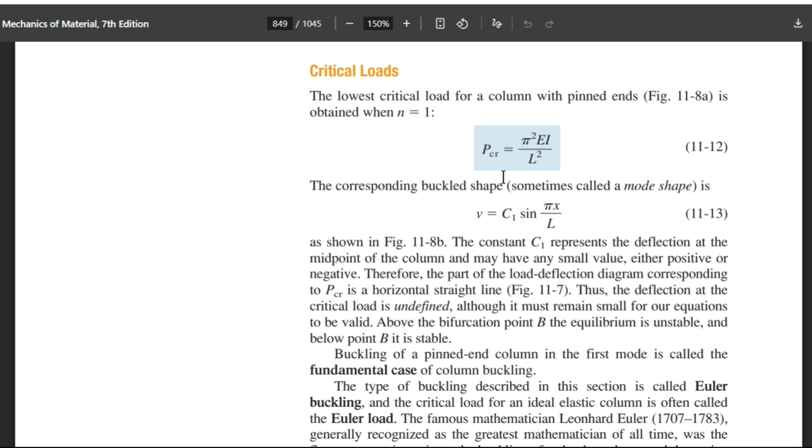So yeah, that's again the act of God thing. We can move this value of C1 anywhere, and it'll stay there. So it's not just, it can be a changing value at that equilibrium. But this equation does give us this value of P critical, and obviously we can set factors of safety to be lower than it.

So it says, thus the deflection at the critical load, yeah, that deflection C1 is undefined. So C1 is an undefined constant of integration. Although it must remain small for our equations to be valid, and that is true—we're saying those deflections are real small, we're using small angle approximation.

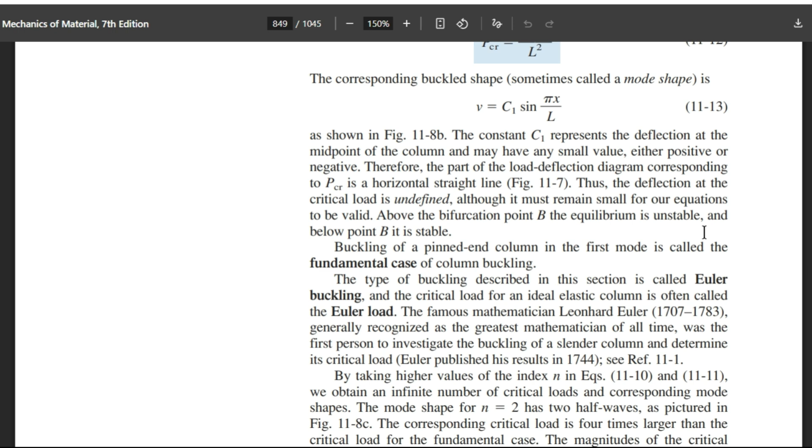Above the bifurcation point B, the equilibrium is unstable, and below point B, it is stable. So we're going back to this column. This is the point where the load becomes unstable, where if we have a slight deflection, then we'll buckle. And that's the bifurcation point B.

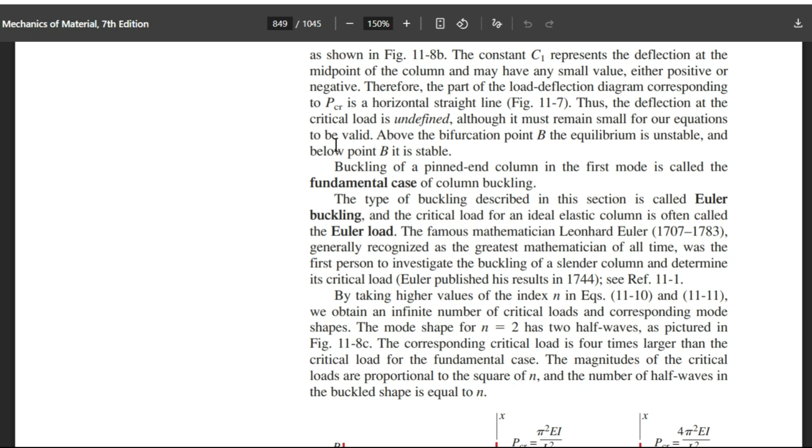Buckling of a pinned column in the first mode is called the fundamental case of column buckling. The type of buckling described in this section is called Euler buckling, and the critical load for an ideal elastic column is often called the Euler load. The famous mathematician Leonhard Euler, 1707 to 1783, generally recognized as the greatest mathematician of all time, was the first person to investigate the buckling of a slender column and determine its critical load.

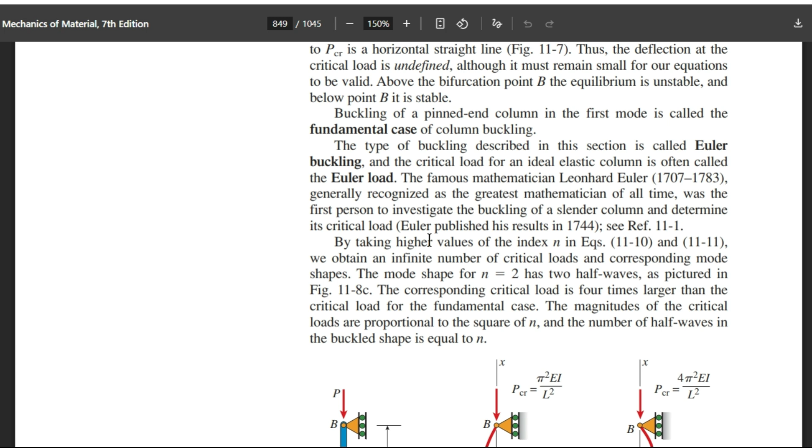Euler published his results in 1744. By taking higher values of the index n in those equations, we obtain an infinite number of critical loads and corresponding mode shapes. The mode shape for n=2 has two half waves, as shown in figure 11.8c. The corresponding critical load is 4 times larger, because your n is squared—your 2 is squared.

Then the critical load for the fundamental case right here. The magnitudes, so why even take that into consideration? Maybe there's some cases where you're like, hell yeah, we had the column and we actually braced it in the middle, so it kind of fits this pattern. We just pushed the material up against it, but it was still free to bend about that point. It wasn't a rigid point holding that column.

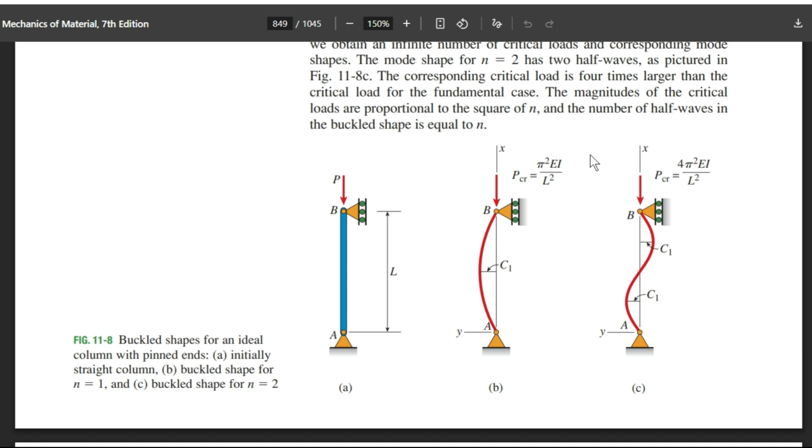Cool, so the magnitudes of the critical loads are proportional to the square of n. If this n doubles, since it's squared, the critical load quadruples. The number of half waves in the buckle shape is equal to n. So if n is 2, I'm going to have 2 half waves. If n is 1, I'm going to have 1 half wave. When I square n, that's going to be the multiple of the critical load.

And I think we did it. So buckled shapes for the higher modes are often of no practical interest, because the column buckles when the axial load P reaches its lowest critical value. The only way to obtain modes of buckling higher than the first is to provide lateral support of the column at intermediate points, such as the midpoints of the column shown in figure 11.8.

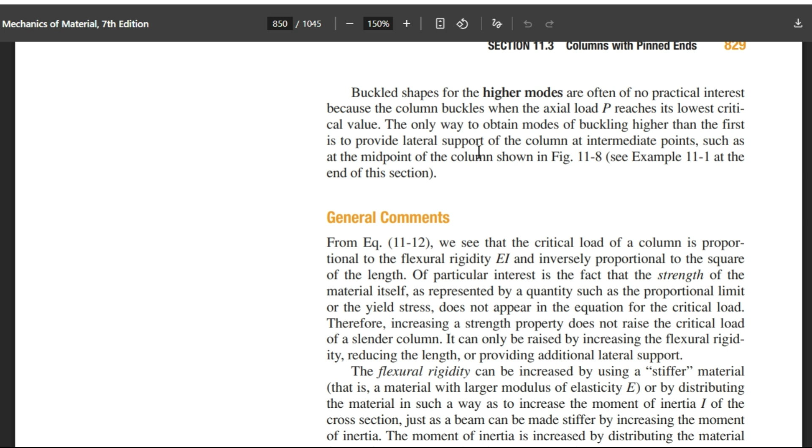See, I'm just spacing out now. But it says the only way to obtain modes of higher buckling than the first is to provide those lateral supports. So I did talk about that. That's the cool thing about reading textbooks for the second and third time, you try to envision what they're going to say.

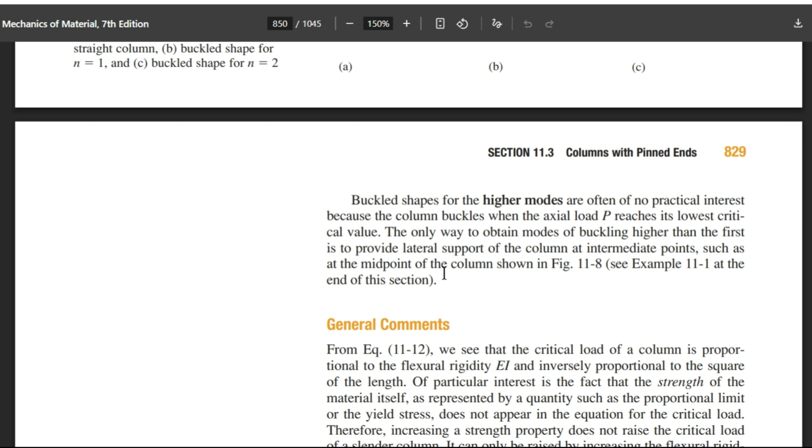So if I do have some sort of lateral supports here, it's still able to freely pivot about that point, then you're going to induce those higher loads, those higher modes. Enough said. The only way to do that is to provide lateral support of the column at intermediate points, such as the midpoint of the column, and that's what we see in figure 11.8. All right, hell yeah, and then I think I'm done.

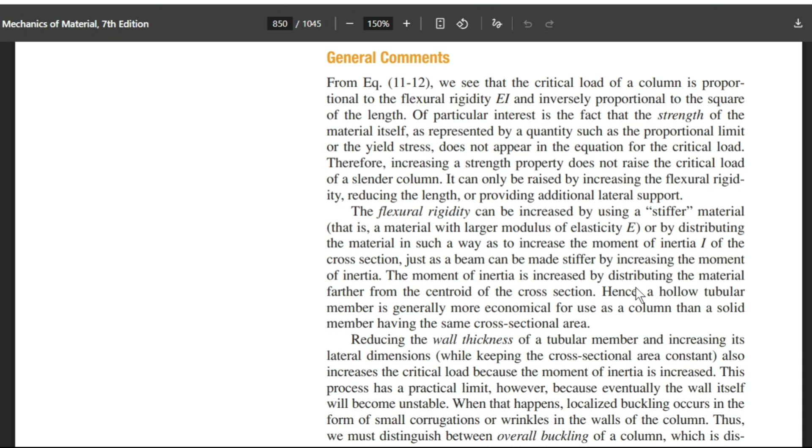I'll just show you these general comments real quick, and then if you want to read about those. But I think we did it, I think I actually got through there. There was one piece I'm going to go back to, but I think we covered that: C1 is an undefined constant of integration. Because it's a point of equilibrium, we can move that C1 to any value, that's kind of the act of God moving that column. And if we are at the critical load, it's not going to buckle.

And so this all comes from this ideal case where the column acts as a spring, that when we do have deflection, that spring is ready to restore it to vertical. That's what most columns do, that stay upright—that spring is hella stiff. And if something does shift the column to the side, that act of God, sure you have that load that's creating a potential to buckle, but this hopefully restores that. And booyah, we used the second order differential equations, and we went through that whole process.

So at that critical load, you can move this and it just stays put, therefore that C1 was this deflection, because we had a function where the general solution was deflection equals C1 times some sine plus C2 times some cosine. We were easily able to find that C2 was 0, but the fact that if we do induce deflection, that has to be represented by that equation, and that is going to be that value of C1. So there you go.